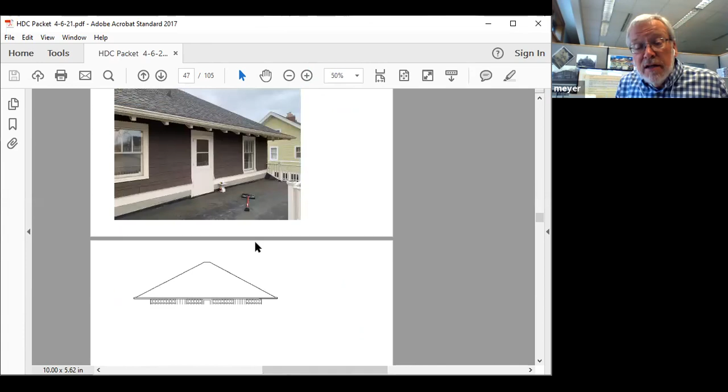If you could go to the front facade—that's pretty straightforward too. There's a window in a room they're converting to a bathroom, visible in the lower picture. In the center of the house, it's an existing wood window, and they're requesting a vinyl window with the same lattice work.

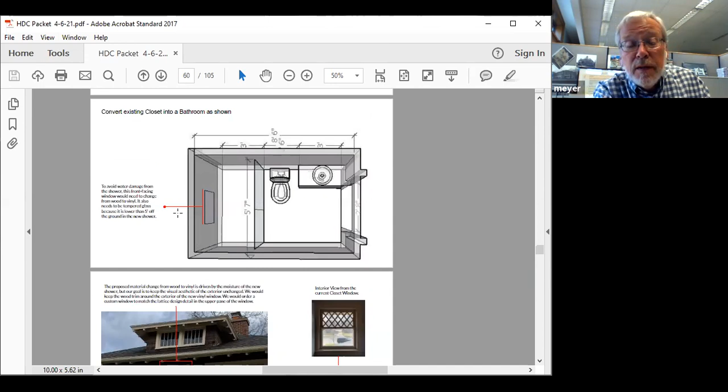If you go up a little higher on that picture, Mallory, you can see the location of the window—it's within the shower enclosure, and they're concerned about moisture damage. So they're proposing a vinyl window to match as closely as possible, including the trim work.

Anything I missed, Dan? Thanks, Phil—you summarized it well. On the back of the house, where there's no moisture concern, we're going like-for-like materials. We love living in the historic district and are excited to do some work on the house and extend the time we get to stay here with our family. The back is really just about the interior layout and renovations we're doing.

The contractor has told us the vinyl will hold up a lot better in terms of the shower, and we've described that to the window manufacturer, who says they can match the lattice work on that front facade window. So I think that'd be the ask—probably the more sensitive topic, or maybe both are, I'm sure. But that's the project in a nutshell.

What's going on inside the house is an interior master suite built on the back, giving the kids their own bathroom and us our own. Right now it's a 1.5 bathroom; this puts it at 2.5, giving us some privacy from our 9 and 6-year-old sons, which we dearly desire.

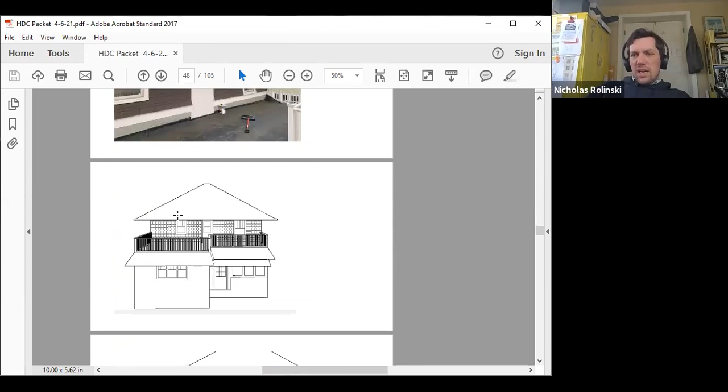Can I ask, Phil, do we have a quorum if I were to abstain from this one? Would we still be all right? Would we still be able to have a vote? We'd still have 4 members, yes.

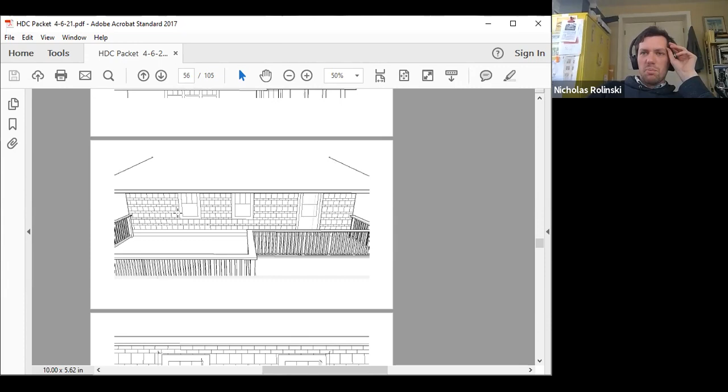Because Dan and Kathy, I don't know if you remember, we interacted at some point on this project, so it might be more appropriate if I don't vote, even though I'm not working on it. Yep, that's fine, Nick, we appreciate the support. I think you were involved when we were talking about a more significant renovation on the back, the larger master.

Okay, I guess the commission ought to vote to excuse Nick from this discussion. Do we have such a motion? So moved—I move that we excuse Nick from voting on this COA. Moved by Cook and supported by Fowler, I think. Those in favor say aye. Aye. Anyone opposed? Okay, carried. Thanks, Nick.

Always best to avoid conflict, or even the appearance of it. I'm struck by the fact that usually when we talk about someone's windows, we don't really care what's on the inside, but we'd like the outside to present as wood. That said, I can't recall ever hearing of a window clad on the inside but not the outside—maybe there's no such thing. But has the homeowner considered that at all?

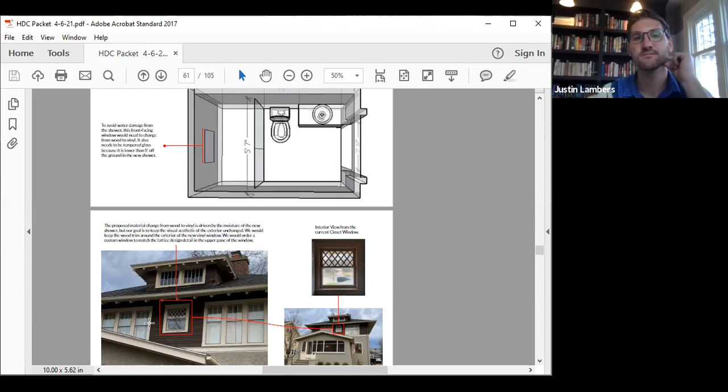Sure. Yeah, I would encourage you to do a little bit more research to find something that's... there might be a solution out there. I know there's wood composite windows and some things that really kind of reach towards that look, that have a little bit less maintenance than real wood.

That would certainly be a better option than vinyl. So does the committee have any recommendations on that? Because admittedly, I think we defaulted to what the contractor was recommending here.

I'm extremely flexible on material, you know what I mean. Like, I would like to avoid putting a storm window inside my shower, I think that could look horrendous. So I'd like to, do you guys have a recommendation on either manufacturers or, like you mentioned, wood composite? I would be happy to take a recommendation here as well.

I guess when I said storm window on the shower, I mean, I'm just brainstorming, but I'm almost thinking like a plexiglass or something that's maybe screwed onto the window frame. Is the shower stall going to be tiled, or what's going on in there?

Yeah, it'll be a tile surround inside there. Because you could strip off whatever, I assume that there's trim around the window on the interior, it would have a molding and everything else. And again, I'm just thinking off the top of my head, if you just strip that away and then installed something that was almost like, maybe even a sheet of plexiglass that's flush with the tile. Again, I haven't ever done this.

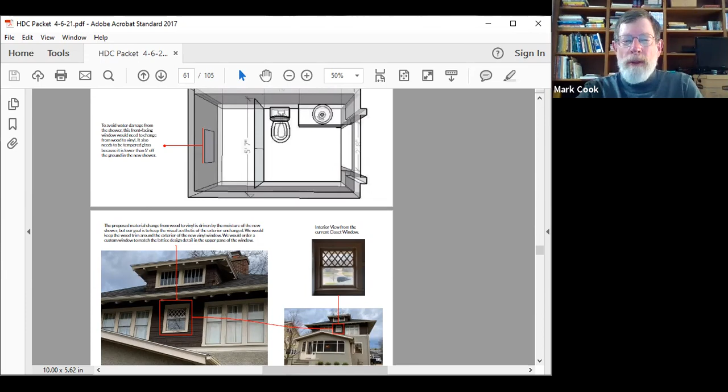Yeah, actually that's not stuff we discussed, but that could look pretty decent in terms of, like, people do glass in showers all the time. So like a pane of glass that's flush with the tile. There's a product called Indow,

INDOW. They're out of Portland, Oregon, and they will send you a sample of a gasketed interior storm. And it's exactly what you want. And actually they offer it in different opacities, so you can get totally opaque, or tinted, or shaded. Speaking as a guy who's got a window in my shower, I sure wish I had not a totally transparent window there.

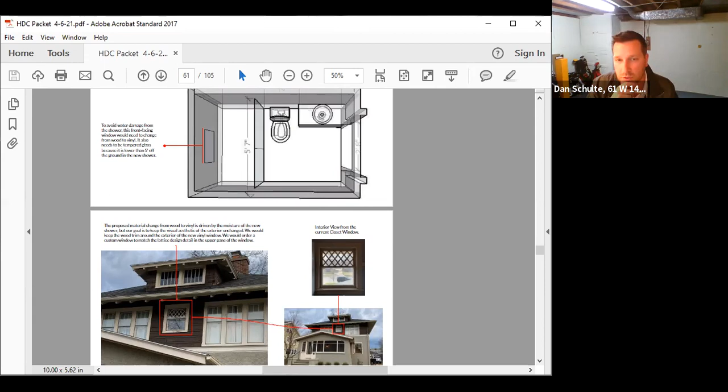Actually, Nick, you bring up a good point. That was actually something also, the window, and apologies for this, it's noted in the document, but the window is less than 5 feet off the ground. And the other concern that brought us to a new window here was the need for tempered glass in a shower.

So I can't speak to the building codes, but my contractor, I was just rereading that as it was on the screen. I think we can solve for... do you know if this Indow company might also make not only frosted glass, but tempered glass?

You wouldn't want the tempered in the Indow product, because tempered is only for impact resistance and safety and stuff. And this thing will literally manually pop in and out of your wood window casing, so it being tempered really isn't going to benefit anybody from a safety standpoint.

Okay. But because you're not making any hard modifications to the window anymore, you may no longer be beholden to retrofitting an old window to current code. In other words, you may be grandfathered in on that window now if you don't touch the window.

I'm not sure about that, you'd have to check with the guys on the third floor, but if you did that, you could legitimately say to them, you're not disturbing that window, you're leaving it as is. And then it would just come down to the question of code and safety, whether they still regard it as, hey, you don't need to be tempered because we're grandfathered in.

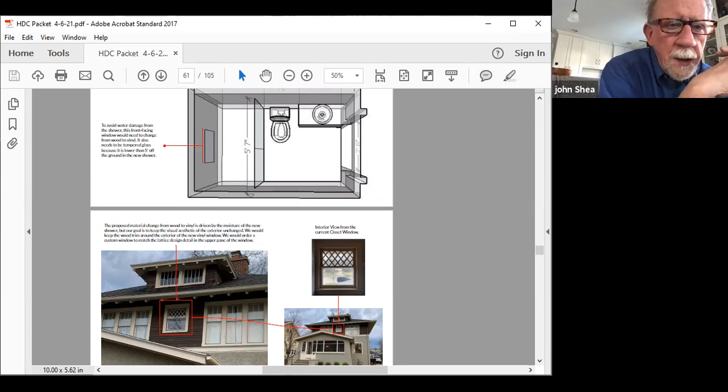Agreed, Nick. And I would guess we have some casing on the inside that probably wants to go and either be replaced with tile or something else, but that doesn't impact the window itself, I don't think. And with the INDOW, that casing could even, I mean obviously with the shower project it changes, but the interior jambs of the window could be what they are today, and you'd be able to do the INDOW.

Yeah, that's great, Nick. So I wrote down the name of the company, INDOW, but it was a gasketed. Would you mind just describing it one more time?

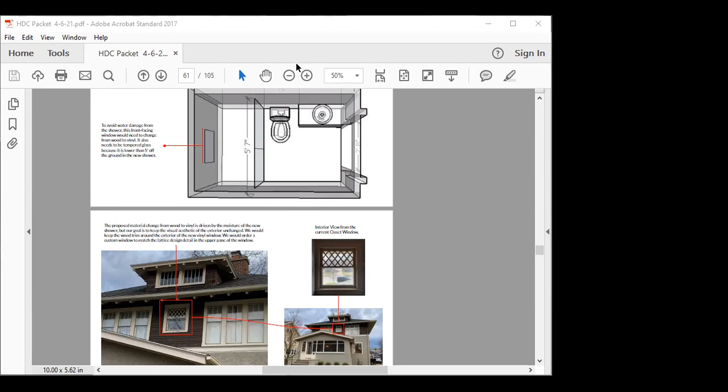I'm going to drop it into a chat. Is there a chat box here for everybody? Yeah, there is. Where the heck is that? Oh wait, actually usually on Zoom there is. No, there's actually not on this one. Sorry. Okay, Mallory, can I reply to this? Can I send this to you and you send it out to Dan here? Yeah, I can get it to Dan. Thanks, I appreciate that, Nick.

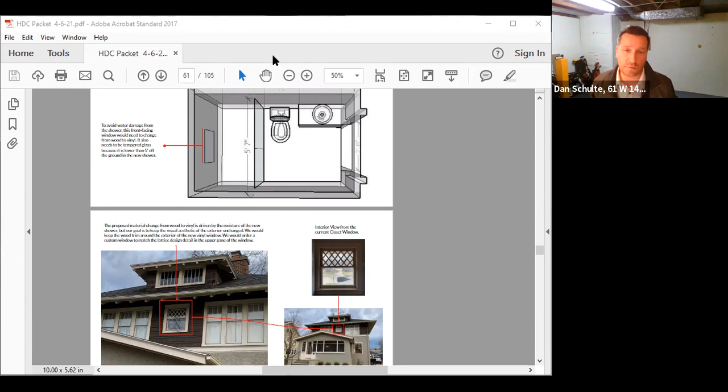Yeah guys, I think you get the picture hopefully from me. The intent, the spirit of this is we love the way the window looks from the outside. We don't want to disturb it. That's totally not the intent. So I'm really happy to have some solutions to explore. Great.

And the beauty of the INDOW is it pops in and out manually with just a little bit of force because it's a rubber gasket that's custom sized to your jambs. So from a mold standpoint in the shower environment, you can pop that sucker out and clean in there whenever you need to. Yeah, that's kind of what I'm picturing - we would basically rebuild the inside of the window with tile, size the INDOW insert to cover that essentially and protect the wood window from moisture. Then anytime you need to dust or clean in there, you can just pop it out, right? Is that kind of it? Yeah, and it's exactly what Mark Cook said. It's an interior storm - in fact I think that's sort of how they market themselves, but it's more elegant than what we're all picturing when we think of that term.

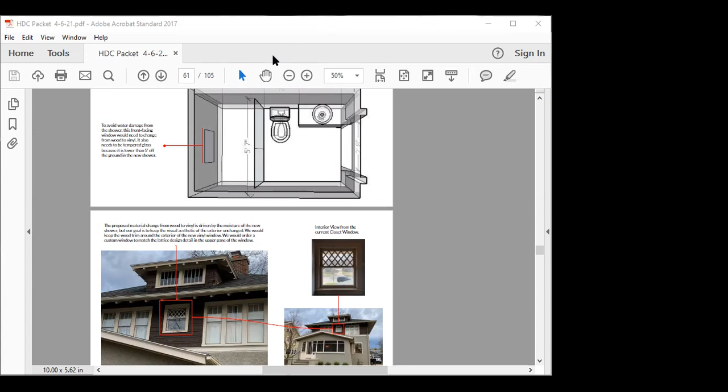Cool, awesome. Well, should we talk a bit about the back? I feel like that's clear on the front facade.

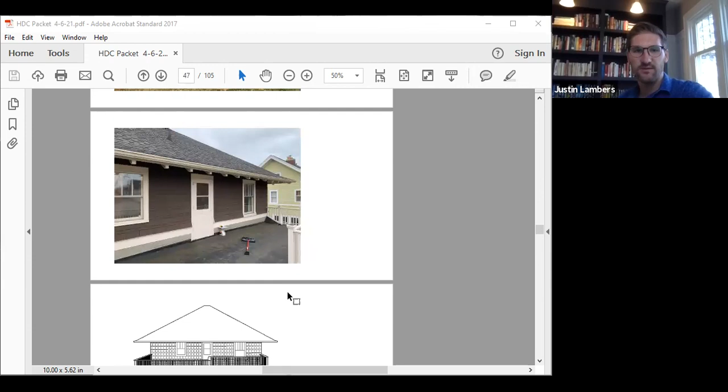I had a question on the back, that door. Did you plan on reusing the existing door, or do you have another door in mind? I didn't see any specs on what that would be. Yeah, no, we didn't provide specs. To be honest, we just have the intent to buy a wood door as close to matching the style of what's there. But no, we don't have specs picked out.

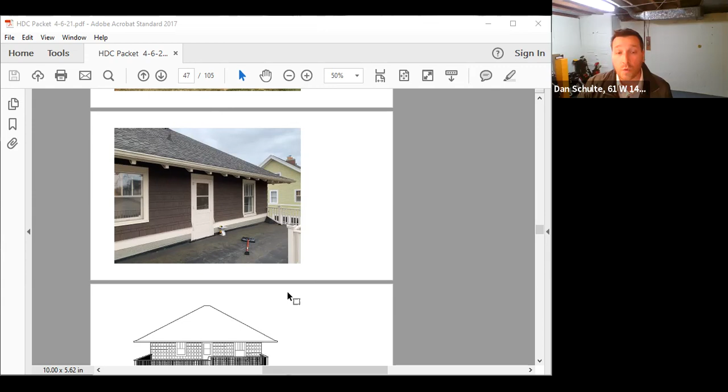What are we looking at there, Dan? Is that a storm door that faces... Yeah, they're inside the home. We will reuse it. So maybe, Justin, to your question, there's a beautiful solid wood door inside of that white door that you can see in that cream color. So that cream color door is a thinner wood - it sort of feels like a screen porch type door thickness, and it forms like a storm door barrier. That's what's exterior, but interior there's a very thick, solid wood door that we would reuse. We would shift it over to the new cutout. So the cutout dimensions would remain the same, and we would work to build another wood door that essentially is like the one that's there. We don't think that one's terribly hard to replicate, just because it's painted wood, essentially.

Are all the proposed changes to the rear only on the second floor, Dan? Yep, they're only on the second floor. Okay.

Are there other questions for Dan?

So the two small windows will look exactly the same, and then the door will virtually look the same too. It's just that it'll be in the space where the current larger window is. Yep, you're right, Mark.

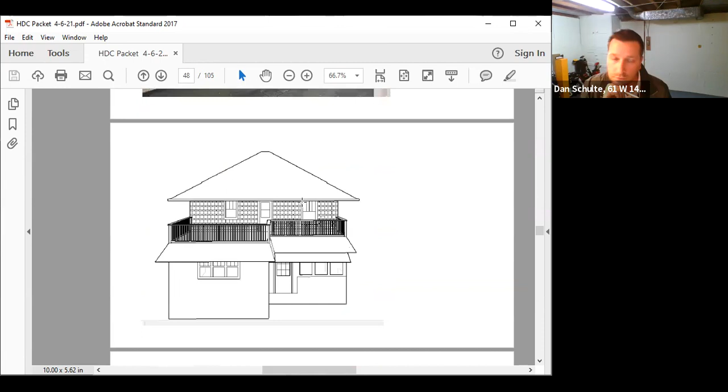That seems pretty straightforward. I agree.

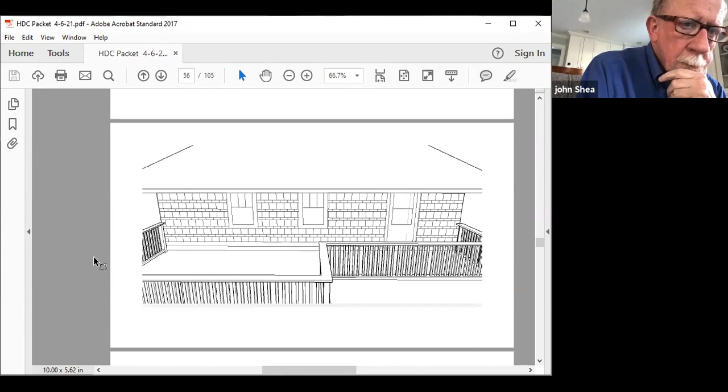Yeah, that's a good view of it right there. So you see the 3 up, 1 down replicated, and then the door on the right. Yep.

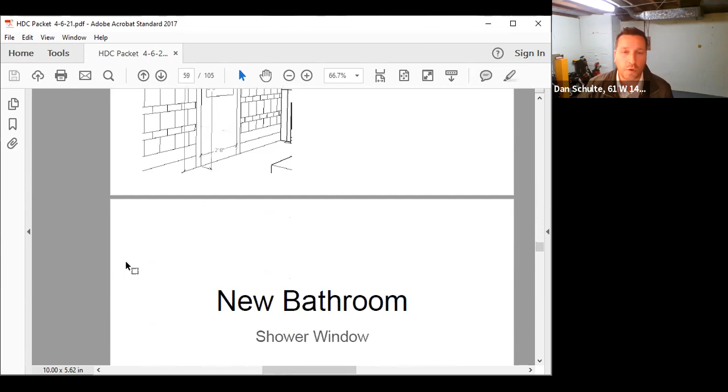And the railing doesn't change any, Dan? No, it's actually in really good shape structurally. To be honest, with this project we haven't quite figured out yet if we're going to need to fully repaint, but we're kind of betting that we will. So it might get a different color of paint, guys, but structurally the railing's in good shape. It's going to stick around.

Great. Any other questions or concerns for Dan?

And what kind of timeline are you looking at for approval? I think the way I'm leaning right now is that the back looks good, but we want to look at some other options for that window in the front. So maybe table this until next month, see what else you can provide us by then. Is that going to work with your schedule?

Yes, and maybe Justin, what we could do today is if the back is approvable as submitted, I'd welcome that to be granted, and bring back a second COA for the front should we need to touch the exterior at all. I took away from this conversation that may no longer be needed if we go with the Indow insert. So if it's acceptable to you guys, I'd rather separate the front from the back and say if the back looks okay, let's go with that. And the front, I think the goal should be to bring back some more homework, a new submission that considers the fact that we might need to change the window or whatever.

I'm going to talk to the guys on the 3rd floor about whether we need tempered glass in the shower, if we can get that grandfathered with the historic district. So if it's acceptable to you guys, let's separate front and back, would be my ask today. Take the one that we can approve and follow up later if we need to.

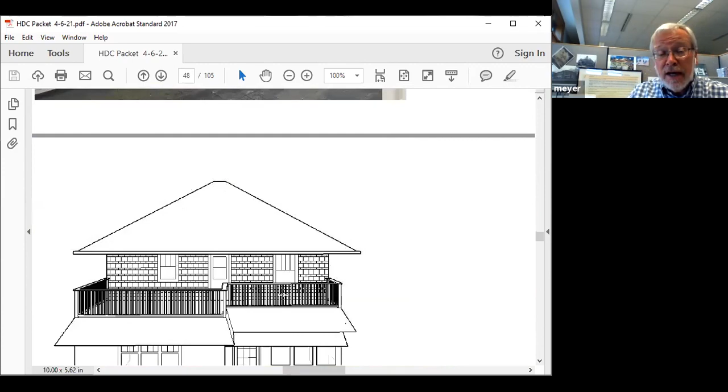Correct. And I do not see any representative on this property here. But it's a sort of straightforward request, particularly since they've already made the improvement. They had a fire in the house. You can see a before picture, a post-fire picture, and then the current condition of the house.

So there was a window. The fire impacted that window, and they removed the window and sided over, just continued the existing siding. There's the sort of post-fire situation. They essentially removed that window. So it's the same siding, matches, maybe a little cleaner than this up at the top, but it's essentially, it matches the existing siding on the house.

Yeah, it's interesting. That color doesn't fade as much as some, so it doesn't look like a patch.

It's too bad those windows, of course, they're somewhat distorted by the vinyl siding, but you know, those old slightly peaked windows, with the trim, they're nice looking windows, but you can see it on the house, the before picture.

Okay, is that a piece of trim at the top, Mark? Yeah, it's just the trim, but it's got a nice little drip cap. I mean, they're just the style of the window. It's an old style that you see in a lot of the older houses. And so I'm sorry to lose a window like that. Plus, probably it makes it darker inside the house.

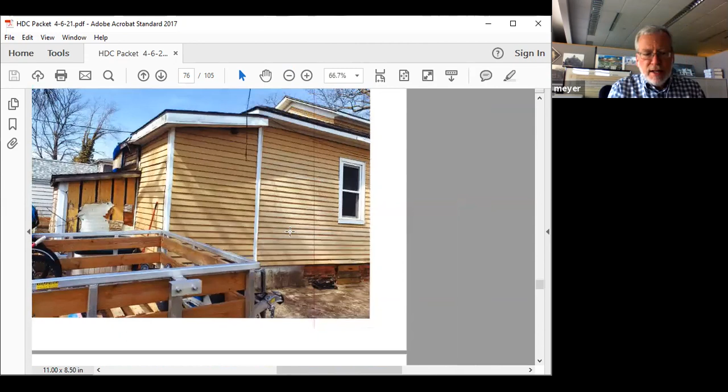There are a number of photographs in here. If you remember, this is the house, speaking of fires, that had the fire a year ago, or maybe a year and a half ago. They've still been laboring over trying to get the fire side done. In fact, that image just to the left is where you approved a repair, really a reconstruction of what was an enclosed side porch there. And that enclosed side porch still hasn't been constructed yet. They had one builder who started to get involved and then walked away from it, so they're having trouble getting projects going or completed.

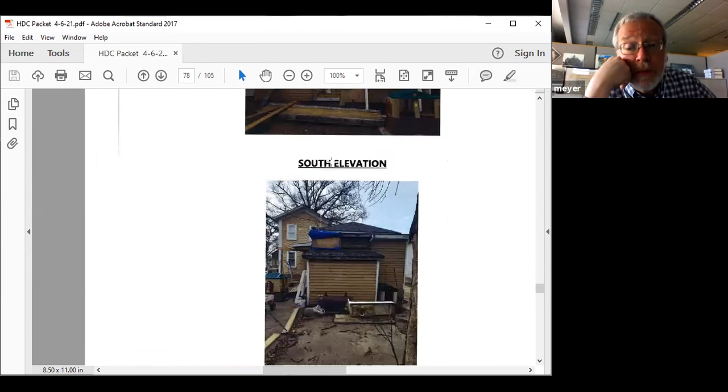Now they are proposing on this back end of the building, removing the shed - that's probably a good picture, the lower of the two here. That shed comes off a portion of that back wing of the building. It's essentially a one-story, I think that's the master bedroom back there, and that's just a little storage attachment. They want to remove that, extend the building towards you in the photograph, but back further, and then put a gable roof on it rather than a hip roof. So they would work with that ridge line of the existing roof and extend that back so it became the gable at the end of that new addition.

Within that, they're proposing a window, which will be smaller but similar to the window that was approved on the back side of that side porch addition. And they want to install a door to the basement on the right side of that proposed extension. So that's existing.

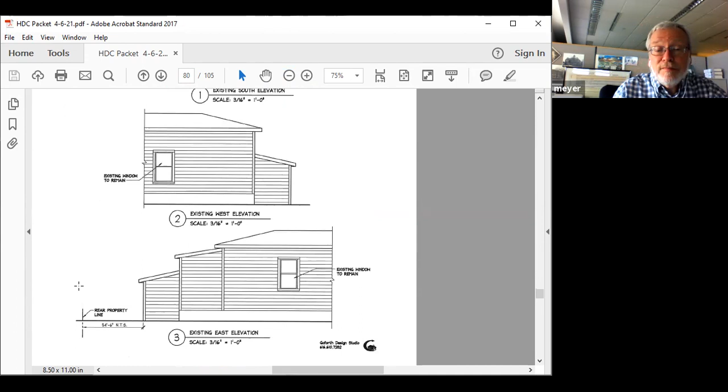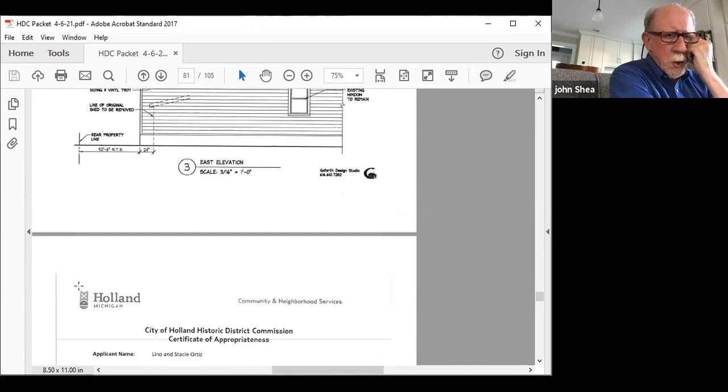I have a question probably for Nick. It strikes me that my house has a gable roof on the tall part and a hip roof on the short part, and that's what this appears to be too. Would that have been typical original construction, or is that something else?

There's a few different topics to consider. It's not necessarily some sort of hallmark of this type of house that it would have a gable and then a hip as the smaller piece. But hips come in handy for this little right angle between the soffit and the corner bead that you can see in this south elevation. Right now, without a frieze board of any kind, you're going to have a piece of siding that's a sharp angle, like a sliver, that goes into the eaves. Can you guys see that? That's a pretty inelegant detail that wouldn't have been used in traditional construction, but gets used quite commonly now. One of the nice things about the hip style roof is that it alleviates that completely.

So that's one. Another one is the pitch of the roof. Is it a pitch that's compatible with the main house's pitch? It's a question worth asking, but not to suggest they must match, because there are plenty of examples in the district where a variety of gable pitches work together on the same house.

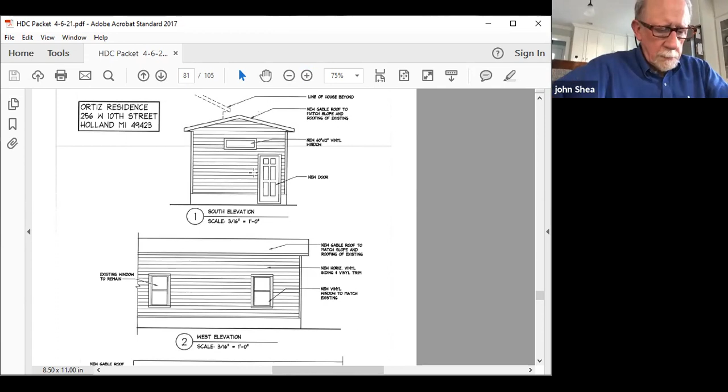The 60-inch wide by 12-inch tall vinyl window has a couple issues. One is it's vinyl. It looks more like a high clerestory window. It would be nice if it was at least sectioned. You would occasionally see a casement window back in the 1910s and 20s just turned 90 degrees to become an awning window, which I always think is a quaint, fun little detail.

I should be careful with that statement about it being inappropriate. There is a Greek Revival eyebrow window that exists within the frieze of some Greek Revival houses that is horizontal, but that's not really what's going on here. It just seems to be a horizontal awning window, so I would say that would not be compatible with the character of the house.

I don't know if we could kill two birds with one stone by saying that the shape of the window isn't authentic, nor is the material, and that we would prefer to see a wood window in that.

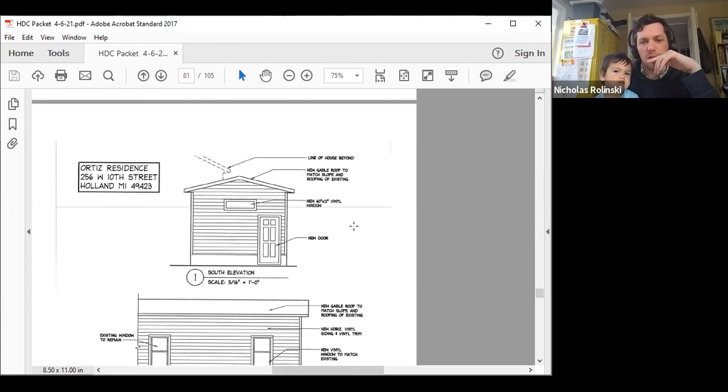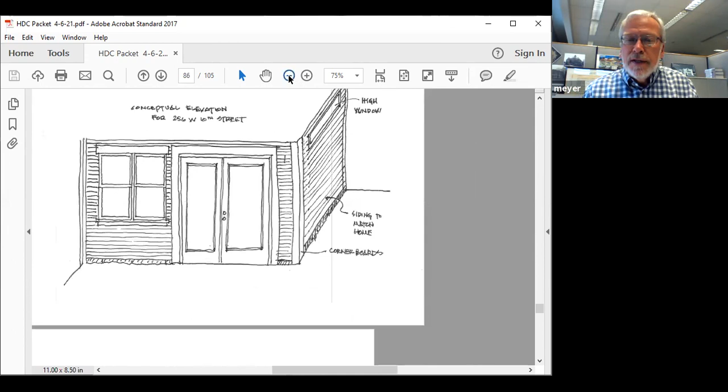So there is a high window that they're trying to, not duplicate exactly, but something similar to that is what they're proposing. I think these high windows are popular right now, but I don't think they're in keeping with a lot of the applications where we see them.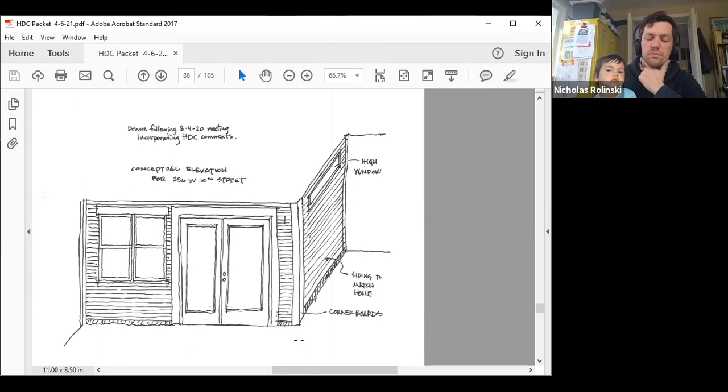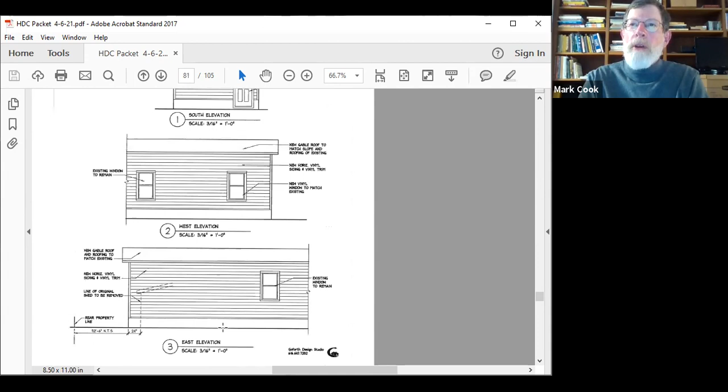So Phil, did we already—this is what we approved in the previous meeting? Yes, so we did approve a high window already. And this in relation to what they're asking for now is where I'm trying to piece this all together. Yeah, this is the porch area, the rebuilt porch area. So on that drawing of Phil's where it said high window, that's the wall, the next wall. Is that correct, Phil?

That if you were continuing around the building, that high window is at sort of right angles to the side of the house. Right, and so the other window would be in the same plane, the same orientation, north facing, correct? Just like the porch window, high window. Yeah. Gotcha, okay, I'm oriented now.

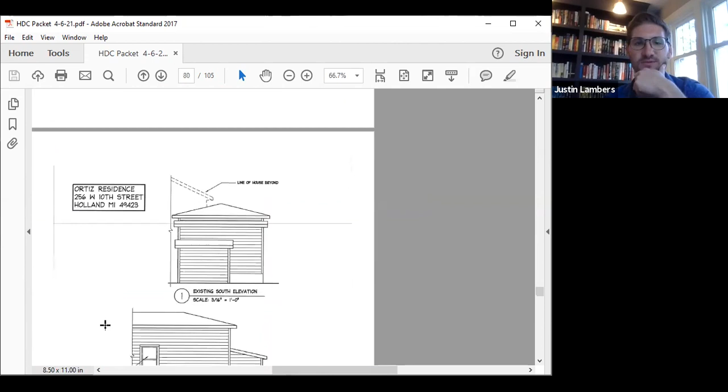Thanks. And did we approve a vinyl window before, or is this the first time I've seen the word vinyl? Yeah, I think so. I was gonna say, if we approved a high window before and we approved vinyl windows before for this, I would find it very hard for us to not be able to approve it on this portion of the build either.

True. Yeah. And there's some solace in the fact that it's rear facing, but that doesn't mean we want to give carte blanche either. If I remember, we were trading some aspects because wasn't this the thing that was going to have all those sliding windows? So I don't know if cutting our losses is quite the way to say it, but I think Phil's sketch is quite an improvement. At least we got the double hung windows in there instead of the sliders. And a wood product with a 4-inch reveal for siding is a plus.

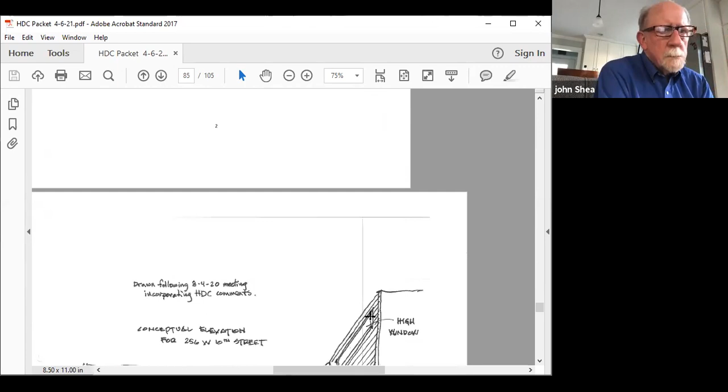Did we do anything about the hip roof? I came away thinking that the hip would be a much improved style of roof. Is what we're looking at right now where the hip would come down from? Or have they taken the hip and just extended it rearward? No, I think the hip would be gone, but the end of this would be the hip. If we said you've got to keep the hip roof, it would be at the end of this wall.

I have not been in the house. The husband indicated that they were looking for some additional headroom in whatever is on the back, and I think it's the bathroom or the closet that's right on that back portion with the high window.

All I'm thinking is, if there are questions about those kinds of changes, I'd suggest you table it and get them at a meeting.

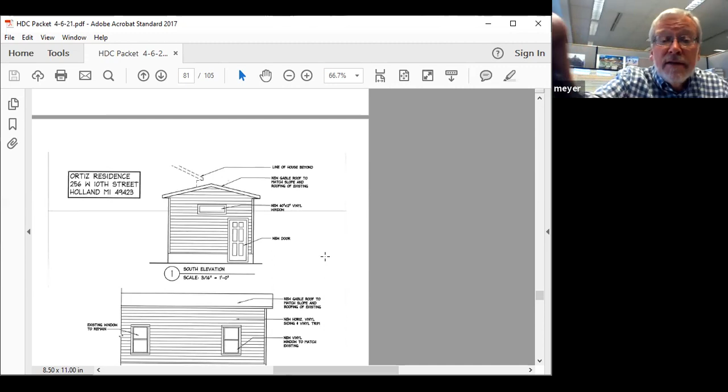If he does a gable, he should include a frieze board underneath the soffit to tie those corner pieces into a frieze board so that he can fix that overhang issue.

Yeah, because when you look at the rest of the house, those panels are really prominent. That's a feature of the house, at least the front. If you look at the picture of the back, from looking at the back there...

One more up, keep going, keep going. What a lot of pictures. One more, there it is. See, there you see the board that Nick's talking about.

So it seems like we would want them to echo that. Is that what you're thinking, Nick? Exactly, because you can see the clapboards don't just keep running into the area of the overhang. They're contained, and then the frieze board meets the corner, which is that fat corner - that's why I think of this house as a Greek revival. I don't know if that's original, but those fat corners recall a pilaster.

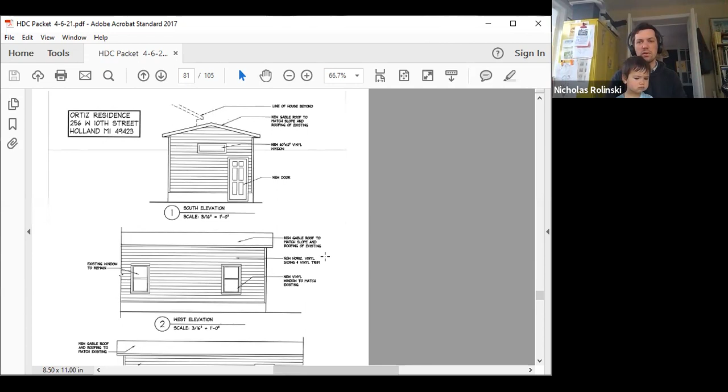Well, I think the hollow profile piece you're talking about wouldn't meet a frieze board as gracefully. It would probably flimsily run into the frieze board. And then what's the frieze board going to be? Probably a Hardie board or something, so we might as well just say there should be a wood or solid composite corner trim and frieze board assembly, if we want to go the direction of the frieze board recommendation.

And for that matter too, the window, the exterior window casements. Oh, yes. Mhm.

Well, it seems like we can't do anything without the homeowner here. But I'm wondering if Phil can at least communicate some of those things to the people and say, here's what we're looking at for changes. And if you want to come to the next meeting, be prepared to talk about them.

I will just say I'll do what I can. Yeah, I know, Phil, you've already done more on this project than most.

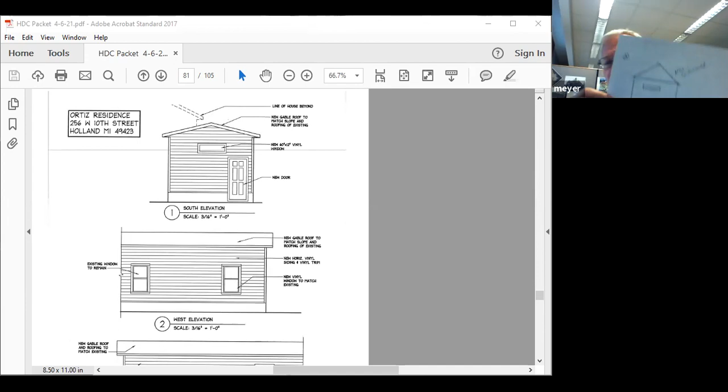Well, I mean, this was the elevation they submitted. Yeah, and there's four of those firms. I urged them to get a hold of, and gave them the names of three or four architects and builders that have done a lot of work. I can't give a specific recommendation.

These folks have done a lot of work in the district. They came back with this, which I don't recognize the name on the thing, so I don't know where they found them. I don't think they've got much in the way of resources, and I don't think they have any particular understanding of this. They've got a sense of what they want to see happen here, but I'm not going to design it for them.

So I will share the comments you've made. I think they're all great comments. Okay, good.

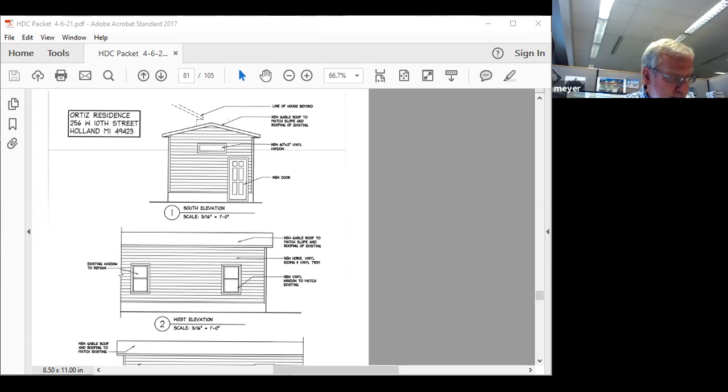Is there a move to table this? So moved. I'll support. I think that was moved by Cook and supported by Lambers. Are there any other comments?

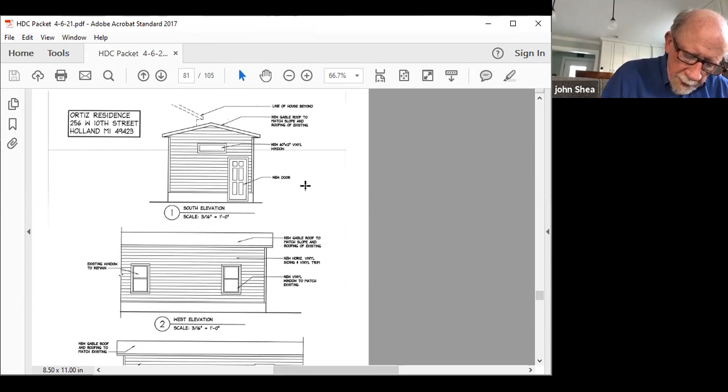Phil, is there anything else you'd like from us, or are you pretty comfortable? No, I get it. Okay, those in favor of the motion to table, please say aye. Aye. Anyone opposed? I hear no one. Let's table that.

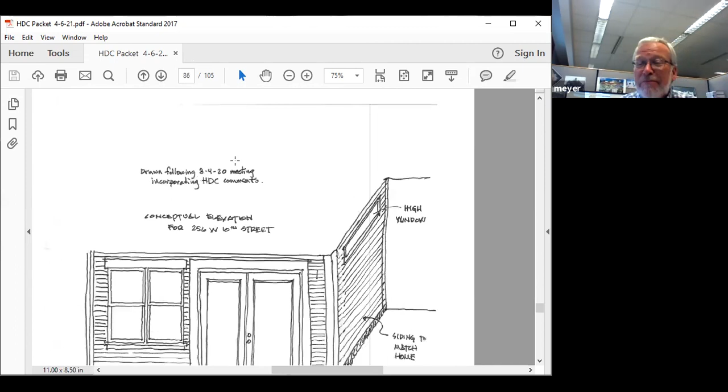We have one more certificate of appropriateness application, 237 West 11th. Michael Collins, infill of porch on east side of house. This is the corner of 11th and Washington. I want to say straightforward, but they haven't been, so I won't say that.

This is a proposal. I think Michael's on, I think he's attending the meeting, I see his name there. This is a proposal for what would be the northeast corner along Washington Boulevard. First floor, there's a covered porch on the first floor of the home.

Changes to the front elevation. Oh, go back one. Yep, stop. Boop, down one. Go to the plan, the next one. This gives you a sense, the current kitchen in the back, and then there's a covered side porch. This gives you sort of the overall sense.

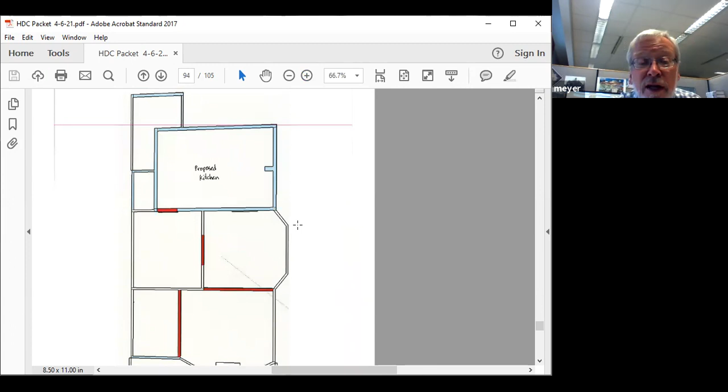What they're planning to do is expand that kitchen into the side porch area, so they want to enclose that side porch. If you move on, you can get a sense of what that means, what it would spatially begin to look like for the kitchen. Next one, there's a little better layout showing how the kitchen might lay out. You notice windows on the rear, the north facade, those will stay.

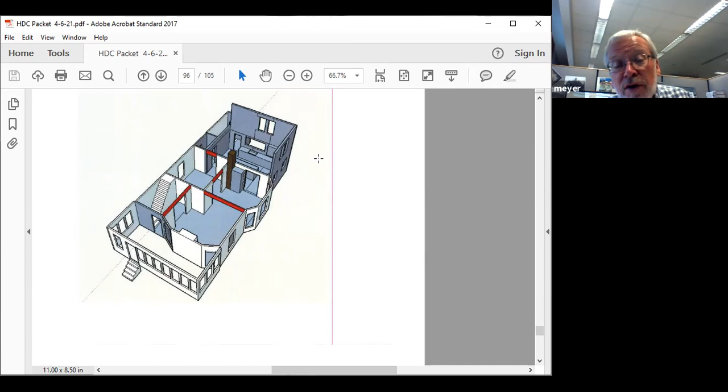And maybe one more image. This gives you, well, you begin to see it on the right-hand side in the back, what's drawn as two stories there. The drawing didn't include the whole building, but it included the parts they're working with. There's a window on the second floor, and the two windows shown there would be brought together on the first floor and essentially align with the two windows above. You can see it in some of the other drawings, which are more accurate than this one is. If you keep going...

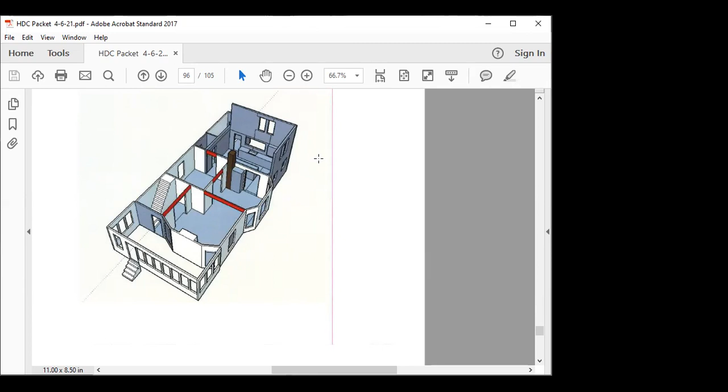Mallory, if you go to the next images. Yeah, keep going. There, go one more.

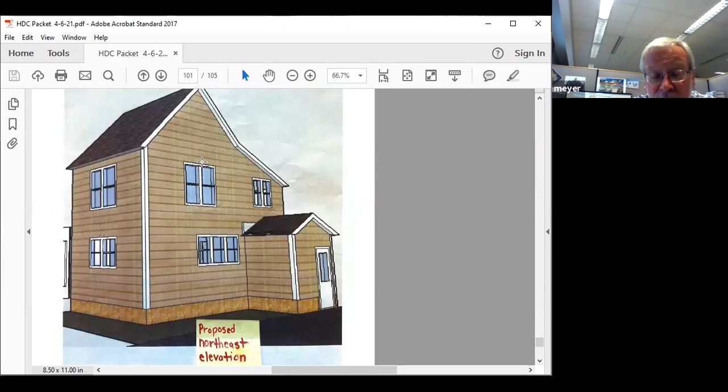There's the area that's to be filled in. Keep going. There's the back, and then the 3 windows together on the side is what the end result will be. And they're intending to infill all of that with the exterior materials matching the existing building.

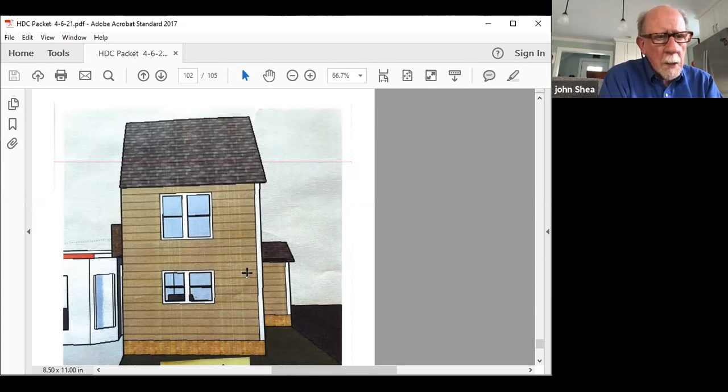I think it's significant that this porch wasn't added on to the house sticking out, it was more like it was carved away. And I'm not even clear that that would have been original. I mean, to have the second floor above an open porch is a little unusual. Michael may have more information as he's gotten into it and explored things. But you might have thought it would have been done a little differently originally. But again, it's not a sleeping porch, which would have been on the second floor typically.

So that's essentially the proposal. I don't know, Michael, is there anything you'd like to add to that?

Hi, everyone. Thanks for having us. We appreciate it. Thanks for your time as well. You clearly stated everything we wanted to do, so we appreciate that. We're just here to answer any questions you might have.

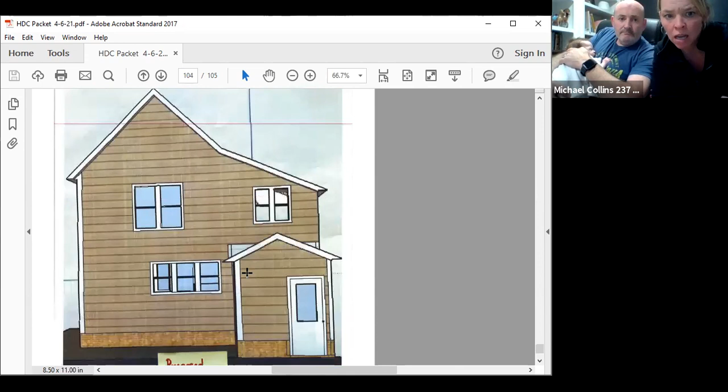But the idea is that the porch was not there initially when my parents moved in years ago across the street, before the house became part of that historic district. So our idea is just to fill it in, but make it match as closely as possible to everything else.

And I should throw in, you won't find 2 people more excited about getting into the historic district than they are—really enthusiastic about this. That's nice to hear. Yeah, we certainly want to do everything correctly and the right way, but we just want to make sure everything we're doing going forward looks good from your perspective, and any input you have would be appreciated.

Do either of you have a sense—I think maybe you just answered it—but that porch wasn't there originally, or was it part of the house originally? My parents live right across the street on Washington and 12th, and when they originally lived there, there was no porch there to their knowledge. That came along after, by the previous owner from whom we purchased the house. I get you, so in the last, I think they said 18 or 20 years. Wow, so they actually carved into the house to create a porch, which took away from the interior living space, unfortunately. Unusual. Okay, great.

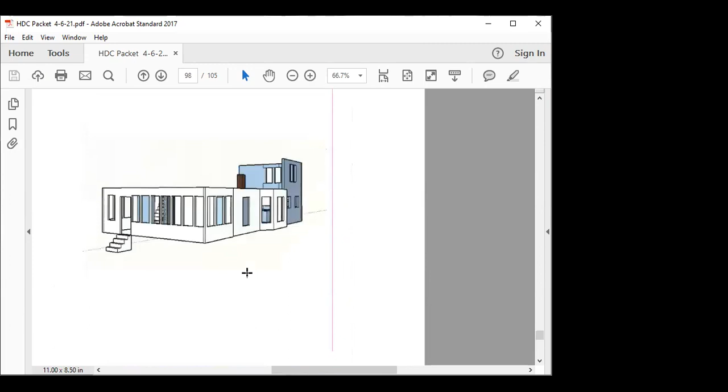The sides of this house and the front, I think, have a lot of symmetry. And I'm just curious if you would think at all about centering that cluster of 3 windows below the upstairs windows. It just seems like it's really offset in a weird way, especially because it sort of goes right into the eave of that back addition. And looking at the internal kitchen layout, it seemed like you could put the sink anywhere you wanted in that counter space.

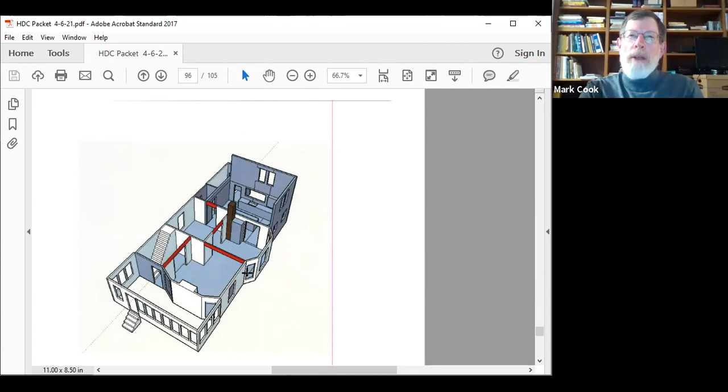Okay, so then move the windows. I mean, I wouldn't say I wouldn't approve it otherwise, but it just seems like it would be an opportunity, since you're going to be doing a lot of work on that whole corner anyway, to just move those windows over—but that might just be me.

Yeah, it's a little uncomfortable. That particular misalignment just seems a little bit awkward. Right here.

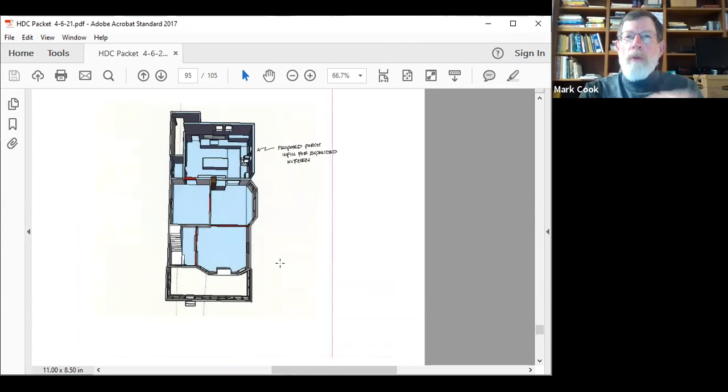But in this view, it looks like there are two windows and they're offset from the sink, if I read it right. And in that different picture version, they're centered in the back wall in a way that the final rendering doesn't show them moved. No, this is showing the second story—those two windows are the two windows on the second story. Oh, I can see that. Okay, you're right, thank you, sorry. I see it now—you can see they're just kind of compressed because we're looking at such a steep, squished angle.

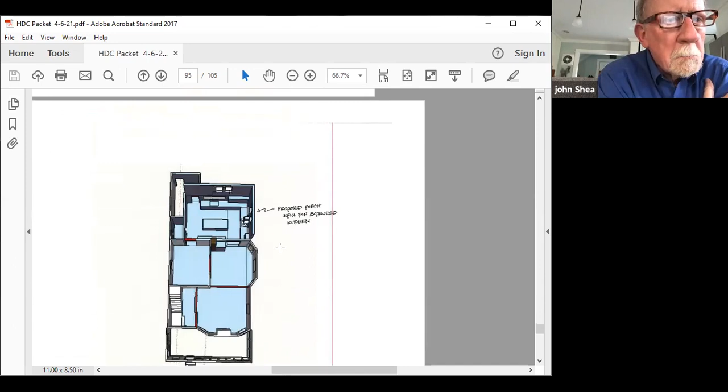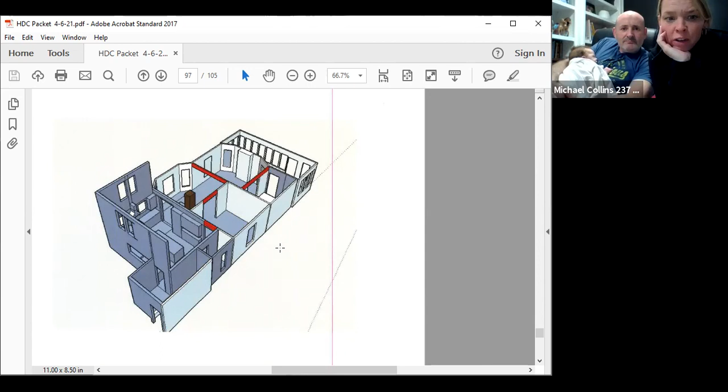Good eyes, Justin. That's right. Have we... because it seems like you could just split the cupboards on either side of the window. I don't know, certainly, but this might be a nice thing. I agree, symmetry is much better than not.

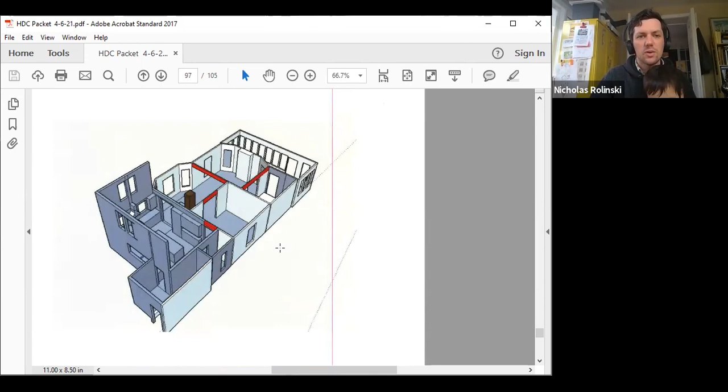None of this is final, so we're open to your ideas for sure. I'd add, while we're talking about symmetry, if you run into a cost constraint and it falls out of scope, the argument to keep it is that the symmetry on the front of the house, well, there's not a ton, but where there is symmetry or more formality, it contrasts with a lack of formality on the back, which I tend to like actually. But I agree with Mark that the read of those two windows, first story and second story, and that misalignment in particular is a little bit jarring.

But if you had to keep it, I could totally rationalize it to myself. I think more often, what happens in the back of the house has more to do with what you need inside, which is fine. In the front we might expect symmetry, but toward the back, okay. People with corner lots have no privacy in the back from the historic viewpoint anyway, they're exposed no matter how you look at it.

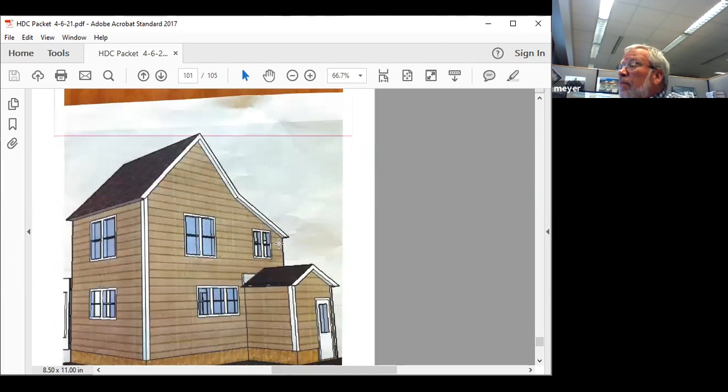Yep, that's true. I've just found a photograph from 2002 which does show the side porch there. So you'd have to go back further than that if there were some changes made. But was it the way it is now, Phil, kind of open? Like it wasn't screened or glass enclosed or anything? No.

Yeah, it's certainly not a feature I associate with this. I don't know, what is it, Eastlake houses, those houses where they have those sort of cutout things, not this style house, at least in my mind. Yeah, this is pretty standard, you would expect that plane to just continue. Same as your house, Mark, I think. Yeah.

Any other questions?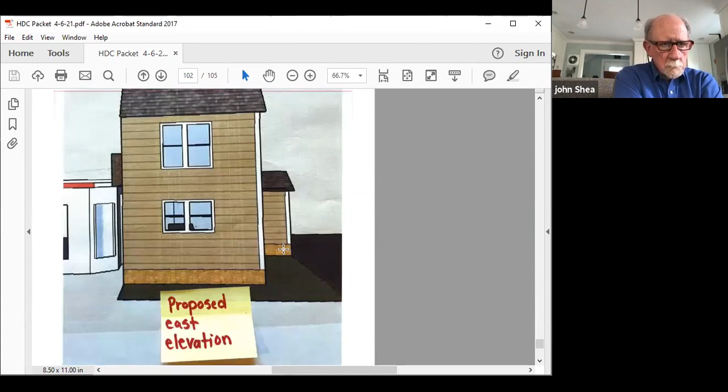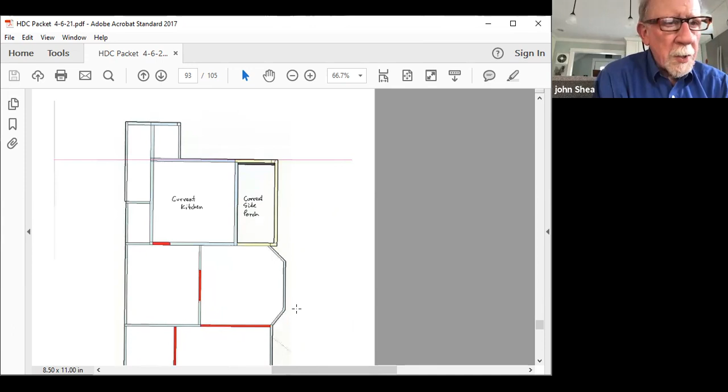Well, the more I see that porch, the less I like it the way it is. The more I think it does belong in your house somehow. I had a house similar to this in a different city where the kitchen was too small, and it also had five doors and three windows, so putting cabinets in was not an easy thing. I think that's maybe the number one thing we want to do with our historic looking houses on the outside is make the kitchens work better on the inside. So I applaud your design. That makes good sense. Thank you.

Any other questions for the homeowners?

I think I'd be ready to make a motion. I would say we're not a design committee and we don't offer design services, but if you have questions and want a second opinion, just based on Phil's statement about you guys being really enthusiastic and interested in this stuff, feel free to reach out through Phil. I'd be happy to kick some ideas around with Phil at City Hall or something like that, because I like it when people are enthusiastic and looking for guidance. So just speaking for myself, I'd throw that out there.

But I would make a motion to approve the application for certificate of appropriateness as submitted per testimony for side porch infill renovations at 237 West 11th Street, based on the local guidelines and Secretary of Interior Standard number 9, which says that new additions, exterior alterations, or related new construction shall not destroy historic materials that characterize the property. The new work shall be differentiated from the old, and shall be compatible with the massing, size, scale, and architectural features to protect the historic integrity of the property and its environment.